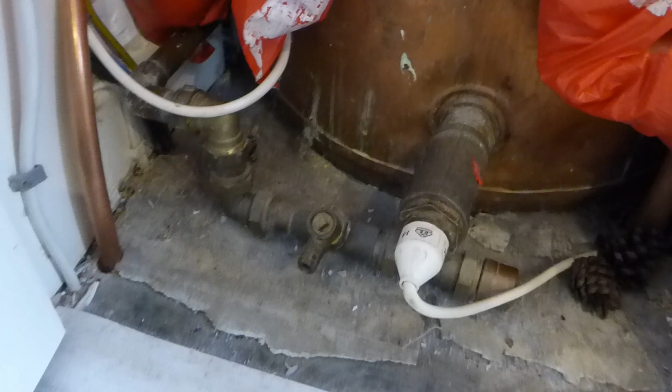And I've had a few who've come back looking at a drain valve by the hot water tank, which I'm going to show you now, and this is not the one, alright. I'll just show you this one right off now. Now here is the drain off valve for the hot water cylinder. This one's to be found near and by the cylinder, and a lot of people are getting confused that this valve drains the central heating system out.

Well, I can assure you that most times that is not the case. This is usually for draining out the hot water tank, and a way of telling that is just to follow the pipe back, follow the way it goes back behind the tank, because 9 times out of 10, not always I know, but you will find a gate valve on there which is used to shut the pipe work off there and isolate and drain the hot water cylinder, and that is normally what that one's for.

So if you see the drain valve by the hot water tank and it's going into it there, that is not the one for central heating, okay? A lot of people are getting confused with that one, and it is a popular mistake. Some people have actually drained out their hot water cylinders instead of the central heating system. Okay, so if you see that one there going in, that is not the one, okay? I will show you the ones on this sketch.

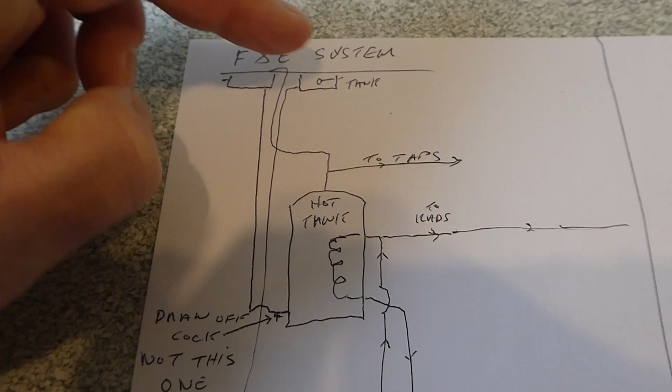Right, here's our first schematic on this side of the paper of a normal F&E system. And as you can see, we've got our little tank, our F&E tank here, and our domestic tank over here. And the one that people are getting, like I've just showed you, confused with is this one here, which is coming from our domestic tank and is feeding the cylinder, and then the water comes out and goes off to our taps. And that is not the one, okay? You can see there that is to drain that hot water tank off. So, you know, don't get confused with this one.

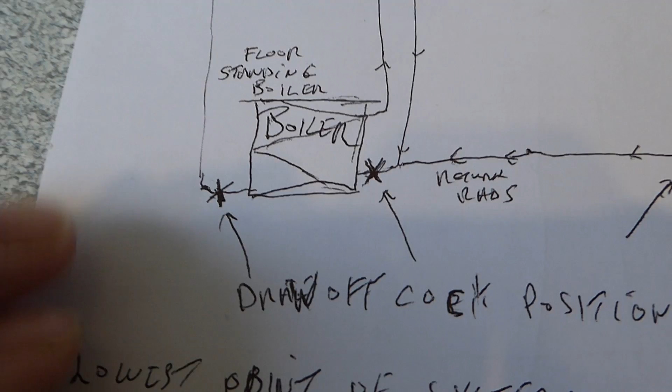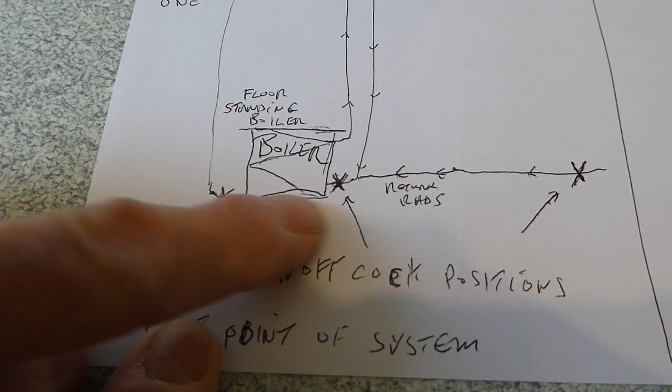Alright, the one to look for will always be on the bottom of your system, downstairs if you live in a house, on the very lowest point, and even if you live in a bungalow, the very lowest point. And if you've got a boiler here, we're showing a floor standing boiler on this occasion, quite often it will be next to the boiler, somewhere next to the boiler here on a flow return. It will be very, very close. Okay, and it can be on the return run from the radiators, which may be over here. Alright, so it's always on the lowest point.

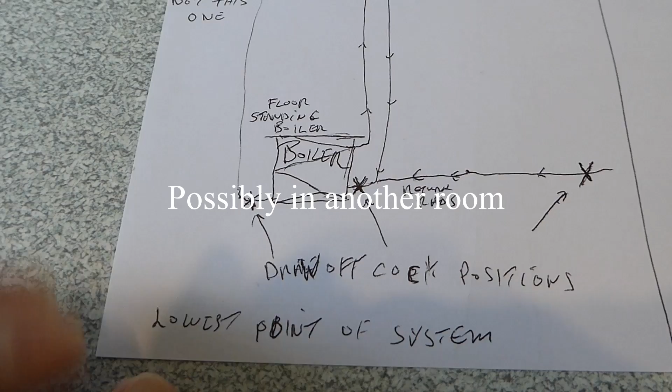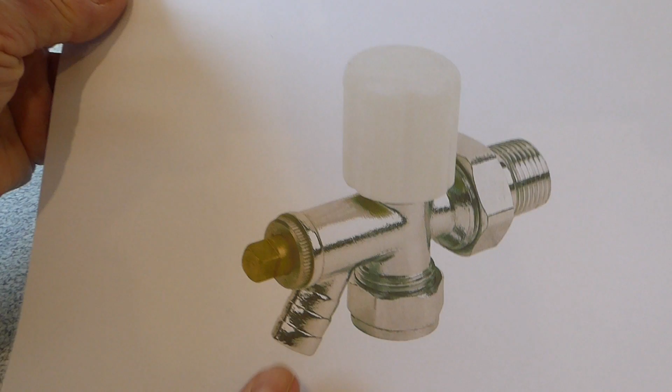Just keep looking around, and it may even be you've got a radiator valve that is one of this type of thing I've shown you here, where it is actually on the radiator and it's a built-in drain off valve at the same time. Okay, so it could well be one of them. Do look for one of those.

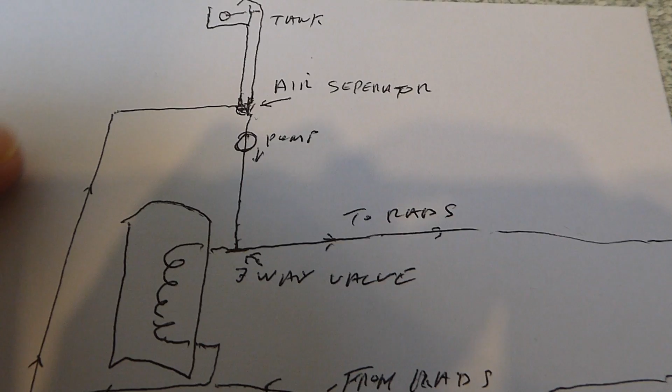On a second drawing over this side, again, you may have a system whereby this cold feed goes into what's called an air separator at the top, an expansion. It's a system that was used quite regularly during the 80s and 90s. I think it's still used a fair bit now. And of course, this one, it depends again, the drain valve will be on the furthest level down.

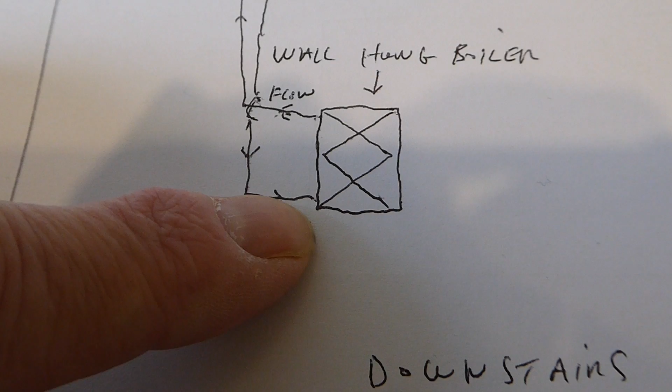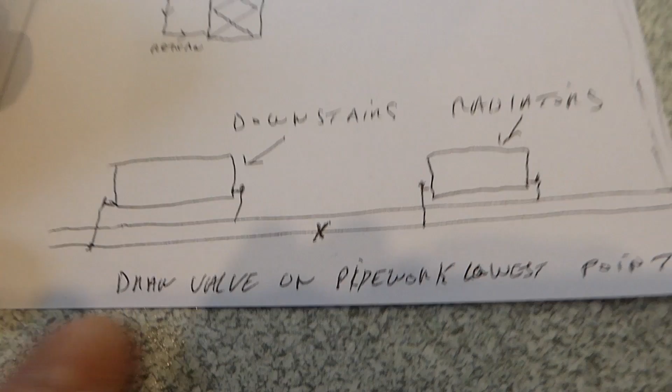Now on this one I've done it as a wall hung boiler, which a lot of people have. Now the drain off won't be around here because the boiler's still too high. If it is, it's in the wrong place. It's just to drain the boiler out, and the associated pipe work on that. Nine times out of ten it still will be at the lowest position in the system. So follow your downstairs radiators and see if you can find it. It will be somewhere here, or again it may be one of those radiator valves I've just shown you to drain it out.

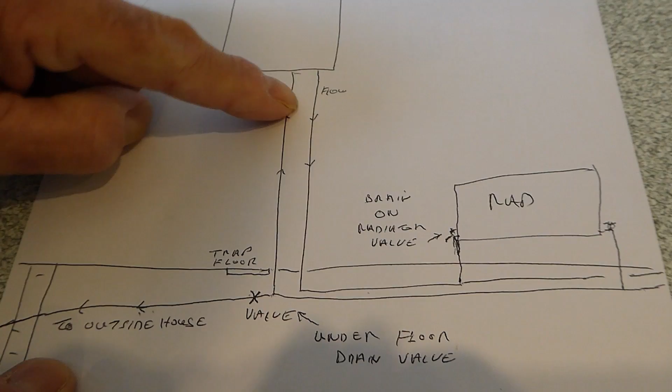Alright, now turn the paper over, and this is for a combi, which a lot of you have got, a combi boiler, and you'll find your pipes seem to go straight down to the floor when you've got a combi. This is the way they're piped up, and if you locate the flow and return, sometimes it could be on the flow and return, the drain valve, but if it is and it's before it goes to the floor, that is the wrong place. Once again, it may be on the radiator valve, as I've just shown you on that picture, or it may be under the floor.

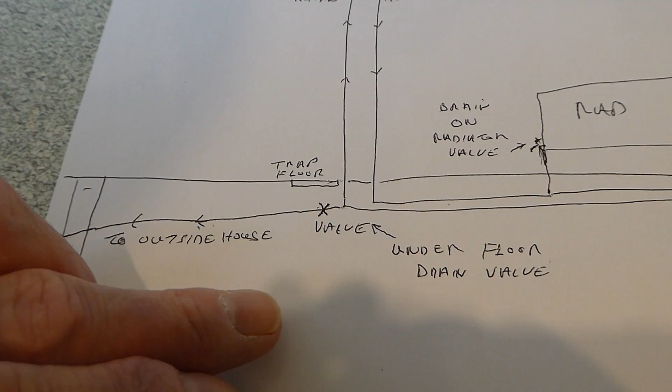Now if your pipes are going under the floor and coming up at the radiator, which is quite common on a combi system, you may find a little trap door where those pipes go under, and find that your drain valve is here under the floor. And the idea is, if you follow the pipe, you may find you've got a little pipe outside the house for emptying the system, and it's done that way to empty the whole lot, everything out of the system, and get it right out of the lowest position.

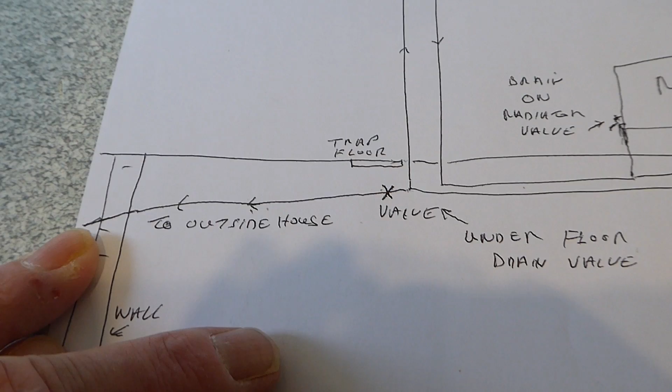Okay, so if you have a look for that, you may find that that is the case, and it might be carpeted over, so you can't find the little trap door because you've moved in and it's all carpeted over and no one's realised that that's there, and therefore your valve is down there. And quite often this happens, and people can't find the drain cock.

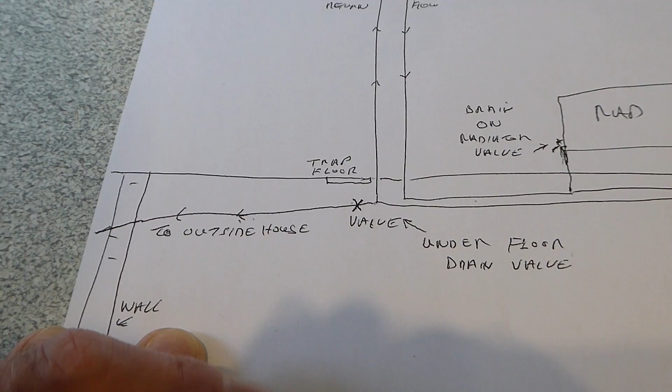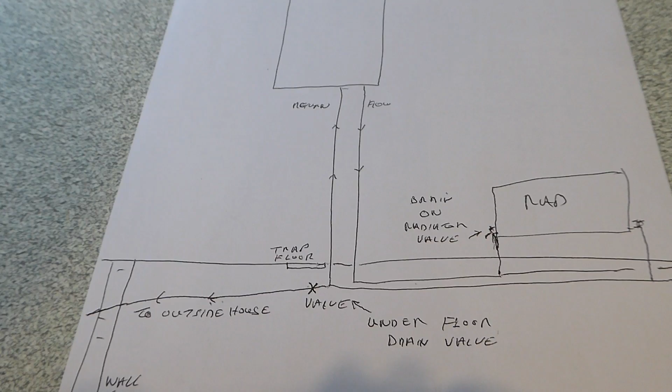Now, if you can't find your drain cock and you don't want to move anything, carpets and stuff wise, to try and find it, I have got a video up there on how to drain the system if you can't find the drain valve. Okay, I'll give you a link to that so you know where to go, and I'll show you on that video how to drain it out if you've got no drain valve or you can't find it. Alright, but generally that is the case for drain valves.

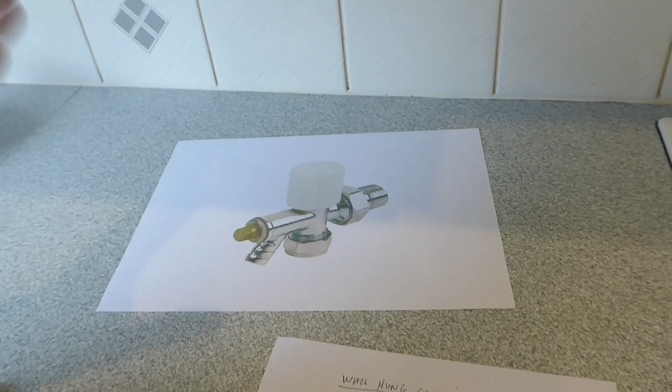And I say, especially the common one, it will be on a radiator valve like that sometimes, but just generally check around. So what we're looking at here, to drain your central heating system out, lowest position possible in the house, that is generally where that drain cock will be, and you'll be able to drain your heating system out through that valve. And I say, I've got that video on how to do it if there's no valve, and you can even then add a valve once that's been done. So that's another job you can do if you haven't got one. Drain it all out the way I've shown you, and then add that valve later on to make life easier for you in the future.